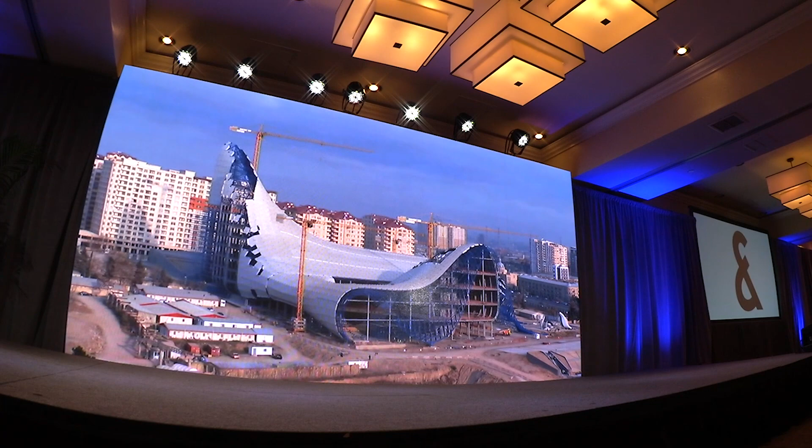Of all the times I've heard "don't look down," this is the one that I'm really being serious about. You're praying for me? That's always an encouraging sign.

Here we go. I'm now 1,000 feet from the surface, 2,000 feet. I'm now deeper than the Grand Canyon. I'm now almost at 8,000 feet. And I'm standing at the deepest point on planet Earth. I think this is the most incredible thing I've ever done in my life. My name is Danny Forster, and this is Build It Bigger.

This is a project designed by Zaha Hadid in Baku, Azerbaijan. Been to great places like Santiago de Compostela. This is the city of culture designed by Peter Eisenman. And this is one of the longest cable stay bridges in the world in Hong Kong. This is the Stonecutters Bridge.

Now, the show at its core isn't just about showing the biggest and the tallest and the deepest and so forth, but rather it's about actually getting onto the buildings and physically understanding the how and the why, how the engineers and builders ultimately execute these projects and why they look the way they look.

One of the things that we feel very strongly about is understanding how a building is inextricably tied to its place. The culture, the climate, the economic context, the sociology, and so forth. How is architecture a direct result of the place in which it's built?

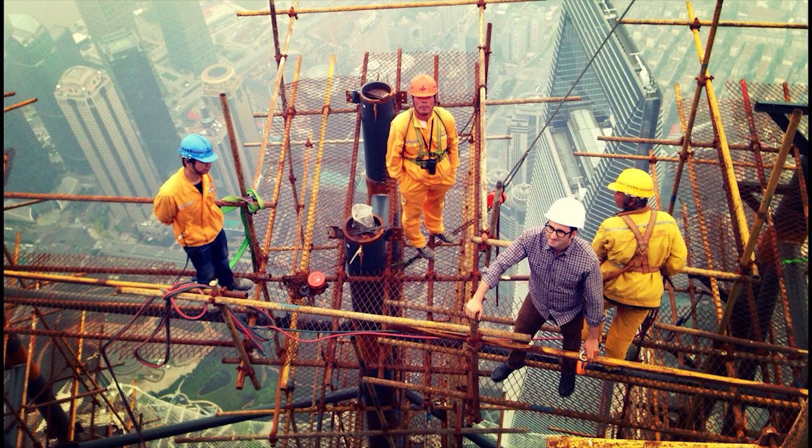A project we did in Shanghai, for those who've been there recently, this is the Shanghai Tower. It's the third of the 3 towers in Pudong in downtown Shanghai. It is the tallest building in China at 2,000 feet tall. And this is an image of us filming the episode. And as you can see, while China has great innovations, they are still waiting on OSHA to arrive.

Just for background, that's the Shanghai World Financial Center. The building looks like a bottle opener. That's 1,650 feet tall. And we're looking down on that building. So that's about 2,000 feet tall. And they're looking forward to getting harnesses at some point in the near future.

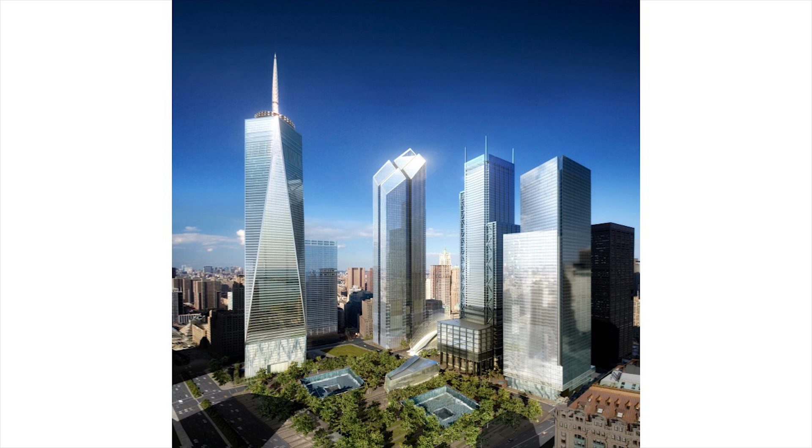In addition to being in front of the camera, I've had the opportunity to spend some time behind the camera. And a few years ago, got to create a documentary series with Steven Spielberg and the Discovery Channel called Rising: Rebuilding Ground Zero, which is a 6-part film that looked at each of the major projects at the World Trade Center site, explaining, again, not just how these buildings were built, but why do they look the way they look?

What meaning is embedded in the design of these buildings that make them inextricably tied to the event of 9/11 and also the development of a new Manhattan? And just by way of example, one of the episodes looked at Santiago Calatrava's transportation hub. Now, who's been to this building here? Who's seen it in New York? Been through it, right? Amazing, slightly overpriced, but very beautiful building in downtown Manhattan.

But have you asked yourself as you walked by it, why does it look the way that it looks? Said more specifically, look at the wings on this building. Pretty asymmetrical, right? Why go to the trouble to design a $4.5 billion train station, crank the building off the New York City axis, which produces asymmetrical ribs in the ceiling? Why do that? Any thoughts? Anyone?

Seemingly arbitrary, right? Very expensive choice. Well, if you look at the building, you can see it's been cranked at a slight axis, thereby putting it too close to its neighboring building to the left, which produces short ribs on one side and very long extended ribs on the other side, which is beautiful.

Now, the reason the ribs are cranked the way they were is because this isn't just a train station, but it's the transportation hub at the World Trade Center site. And so while every day during the year these beautiful shadows come into the space, they wanted a memorial in light, one that could never be changed. And if we remember 9/11, the sky was so blue and clear that day.

And so every year, heretofore at 8:46 a.m., which was the time at which the first plane hit the first tower, when you enter this building, instead of seeing shadows as you do at an angle, every single year for just a moment, shadows inside of this building will be symmetrical down the center of the spine of the building just for that moment, and then it will go on the rest of its day.

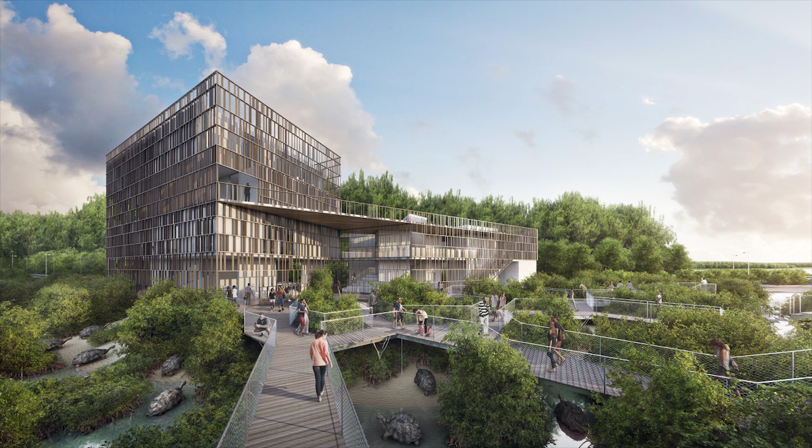Now, in terms of the work that we do architecturally, which is what I'm going to talk about today, my practice does a wide range of work from cultural buildings. This is a museum of environmental history in the Seychelles. This is a museum of ethnography in Budapest. This is the first building in a very large 11 million square foot master plan in downtown Charlotte called First Ward, which is under construction right now.

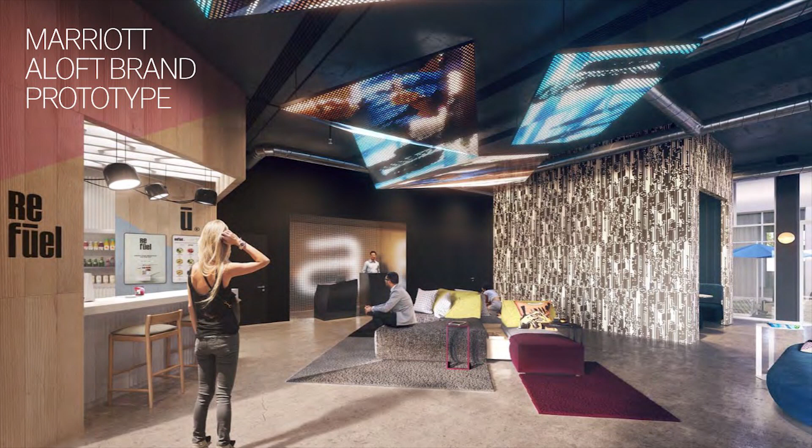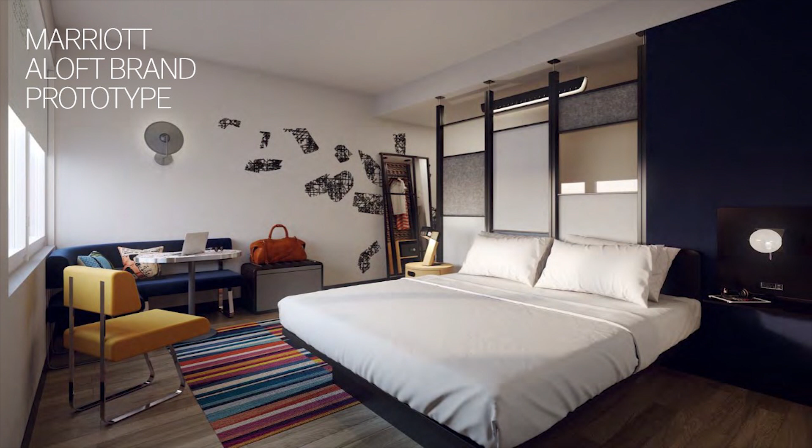We do housing and a whole host of stuff, but our practice is really focused on hospitality the past, say, 7 or 8 years. Recently, as Michael mentioned, with the acquisition of Starwood and the Marriott merger, we were really honored to be invited to take the ALOFT brand, a 10-year-old hotel brand, and reimagine it, create a new prototype, and relaunch it. And actually, we're building the first brick and mortar one right now, but all ALOFTs are part of the Generation 4. This is a design that we created.

But what I want to talk about is take a slightly deeper dive into 3 projects right now, 3 hotels in New York City, and really talk about our journey to modular. Not to say that it's the greatest thing, it's faster, it's cheaper, it's the future, everything's fine, but to show you how we honestly came to arrive at being modular architects and be candid about the struggles that got us there.

This is a project we completed about 2 years ago. Very proud of the building. It's the World Trade Center Courtyard Marriott. Won the Alice Award for Best Development 2 years ago. Sold shortly after its opening. Kind of interesting, compelling building just south of Tower 1 of the World Trade Center. So there's Tower 1, there's Tower 4. Just south of Tower 4, if you look, there's our site. So we like to think of ourselves as Tower 4.5.

And I say that affectionately in the sense that for us, it was a real important opportunity, yes, to create a great hotel, but to find a way to connect this building to the master plan of the World Trade Center site and make it part of that campus. And the way we did that was, in a sense, saying the World Trade Center ends here. And we literally designed the building to have a very austere stone south facade that said, that's old Manhattan and that's new Manhattan. And there's our building that defines that southern edge of the campus. You can see it right there, quite literally.

We've got relentless square windows on one side and a very, very different facade to the other side. So the building sort of speaks 2 languages. Old New York to one side, then a very dramatic, crisp, taut window wall looking to the north.

You'll notice the building cantilevers over its adjacent neighbor, which for those of you who build in tight urban areas, we oftentimes come up with crazy gymnastics to get an additional room into the plan, right? We call it FAR, floor area ratio, but at the end of the day it's how much real estate can I squeeze onto the site to raise the profitability of the building. It's that simple, right?

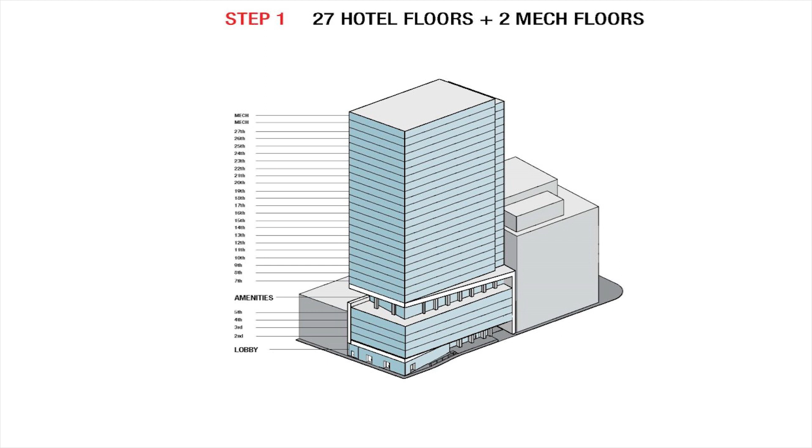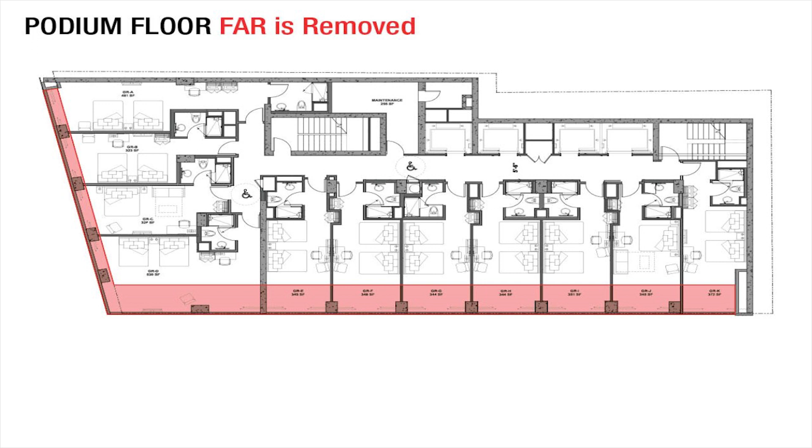But the problem was our podium, right, the first 5 stories of the building were really fat. And big, fat, long hotel rooms don't make more profitable hotel rooms. They just oftentimes can be wasted space. And quite specifically, if you look at the plan of our rooms here on the south side of the tower, we ended up with a queen-queen or a double-double condition that had a 345 square foot room, which I'll be honest with you, in New York City, it's too big. We get away with murder. I mean, we've got the Bowery Hotel here, right? The Pod Hotel, you can get away with 86 square foot hotel rooms.

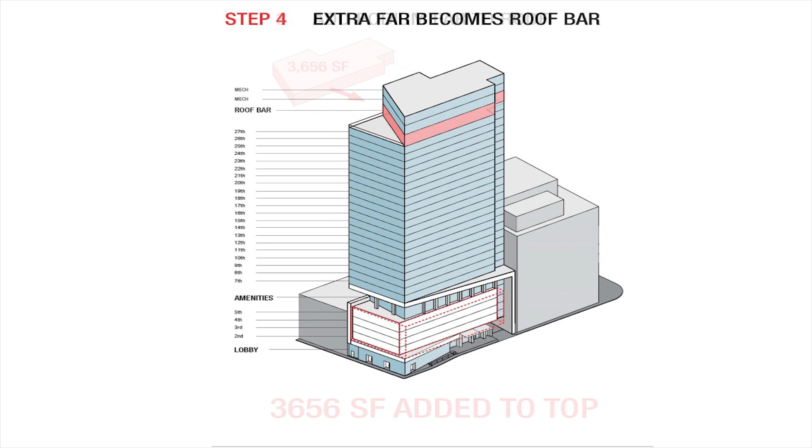But my point here is the argument was made that could we find a way to compress the hotel room, to actually pull that room back and not use up that real estate? Well, the problem was it's against the law. So what do we do? We chopped that bit of real estate off just a little bit here from the west side of the building, and we said, okay, if we just took that real estate, that 3,656 square feet, and we yanked it off the building, reshaped it, put it on top of the building, set the building back, you could create an amazing rooftop experience with a triangular outdoor space with an incredible view of the World Trade Center memorial pools. That would be great.

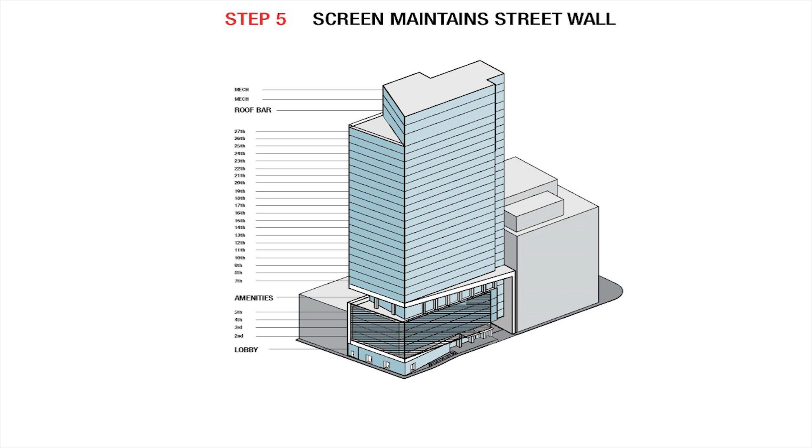The problem is, we've just broken the law because the city says you must hold the street wall. The problem is the city also says if you put a wall there with a hotel room behind it, that's not legal light and air, that's not a hotel room. So our challenge was, how do you produce something that is both a window to one group and a wall to another? Literally two diametrically opposed things. And what we came up with was this.

It's an algorithmically generated cantilevered screen wall made up of mesh. The mesh is 50% opaque and 50% transparent. There's 50% coverage of the mesh, therefore 50% open. So one group said you can't be more than 50% covered. One group said you have to be no less than 50% covered. Turns out we had one solution that satisfied both groups. It's an interesting, bizarre way to wrap the bottom of a building. Produces a kind of interesting design.

Each and every single piece was subtly shifted such that every operable window still has clear access, so you can still take your Instagram photos. And in some cases, you could make the argument that it's a kind of interesting architectural detail from inside of the rooms. Now, I showed this just to say that it worked. It took 6 months. If you try and apply for a screen wall in Manhattan right now, the Department of Buildings has like my face on the wall and will say no. And I say that because this is a bit of a kind of a unicorn, right?

We did it once. We as architects were able to make a good building that followed zoning, that helped our owner to get more additional FAR, add rooms, add a rooftop bar. So as architects, we could participate in the process beyond just making it beautiful or effective or operationally sound. But this is hardly something I can do a second time, right? We did it once. So how do we then, as architects, find a way to contribute in the process to the bottom line beyond just making the building work?

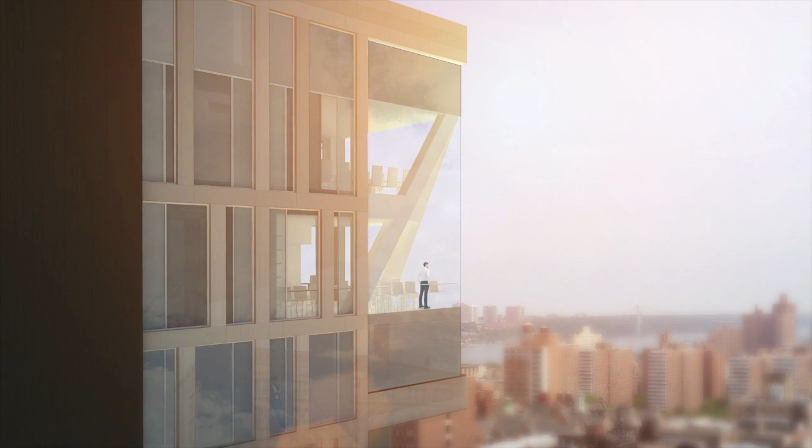It's got a kind of beautiful, large, upper double-height space in the top of the building, great views out to the west, an interesting flipped-up column on the corner to create a double-height looking northbound. But at the bottom of the building, what we ended up doing was actually literally removing as much real estate as we could to have as small a footprint as possible when the building met the ground, so we could then take that real estate, as I talked about, and redistribute it to the top of the building.

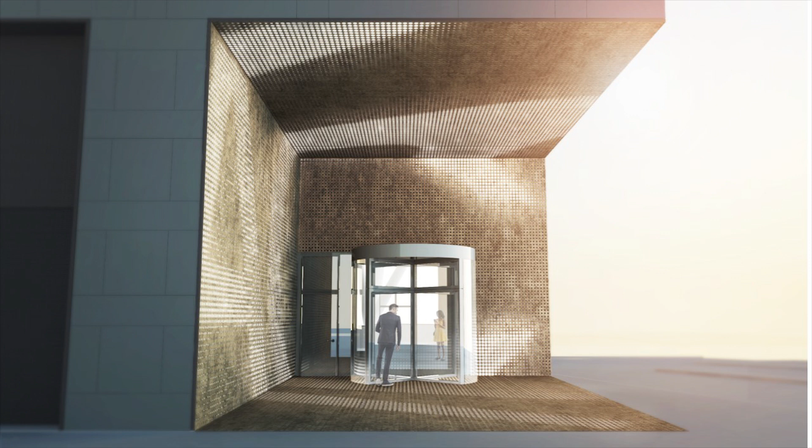And nowhere is that more dramatic than at the entry of the building, where instead of having a canopy, we literally have a missing tooth of the building, a sort of missing leg of the stool, where you move under a double cantilever 20-foot tall, 28-foot long entry to come into the space. All of that is a preamble to say this.

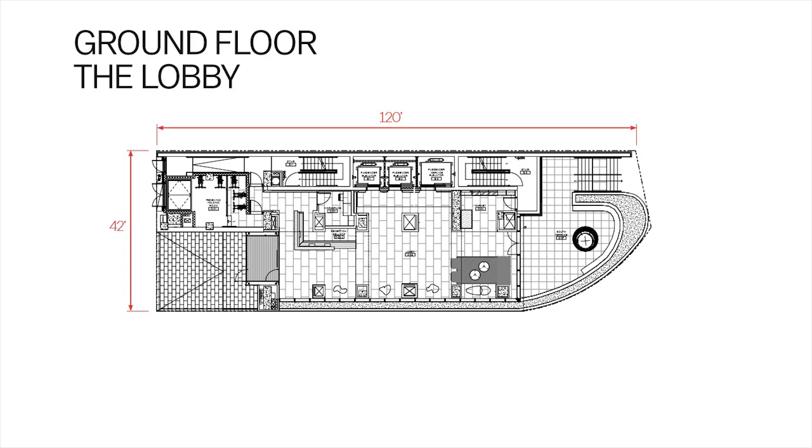When we inherited the site, these were the dimensions given to us, 42 feet wide by 120 feet long, and the developer didn't have the ability to have windows on that side. So in a sense, it's a three-facade building, right? It's a three-facade building. It's 42 feet wide. It'll be a cast-in-place concrete building. From that moment, when those three decisions were made, my hands were kind of tied.

Yeah, we could do good things. We could value engineer the curtain wall. We could have clever ways to make it work. But when you look at that guest floor plan and you see where the elevators are, the stairs are, the rooms are, the size of the rooms, the corridor, I'd like to say I had a lot of flexibility to make a really good plan, but I didn't.

And the logistics of the site and the size of the site and the methodology of building it drove the entire process and the budget of the building. And we're grappling with this project's budget for that very reason. So as an architect, you're kind of frustrated. You wish you could do more. And in this case, building it as we did, we couldn't. We did the best that we could.

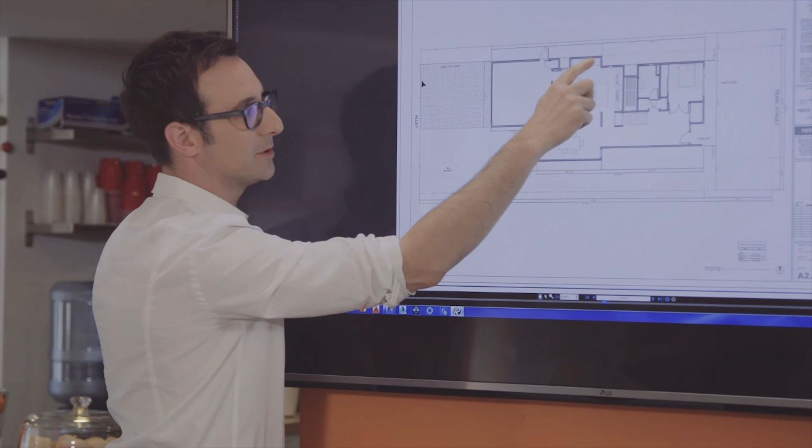Now, modular, of course, would make a lot of sense for a lot of different reasons. And I had been curious about modular for a very long time. I've actually been working on a new TV show about modular, but this is the kind of modular America does: wood frame, single family home. We've got a great history in this country of doing wood frame modular. This is one of those shows where you meet the family, they tell you what they want, we design a house for them, we tell them it's going to be great, we show them the house, I tell them how good it is, they agree.

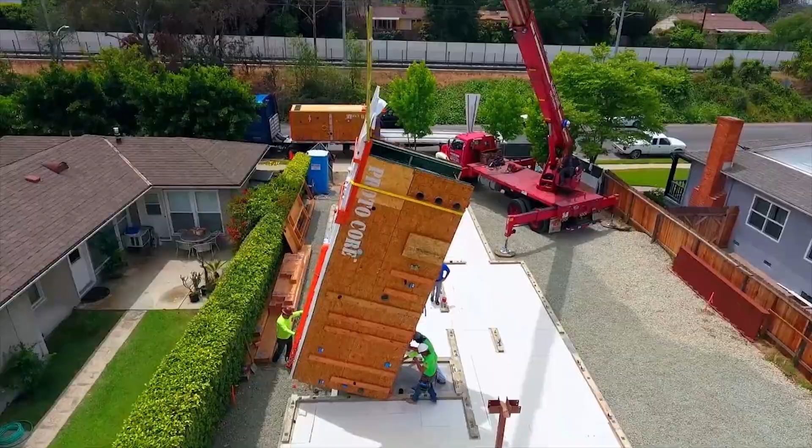We then build it in just a matter of weeks. A truck comes to the house, we drop the core down. This is quite cool. In this core, you have all the MEP, literally all the infrastructure in one shot. The bathrooms and the kitchen click into it. The very same day, we stack up a series of walls, and then 14 weeks later, you have a house. It's great, totally cool. And that works. And in America, we've done this for quite a while. We've got different companies with different kinds of capabilities for wood frame modular, and it's been very successful.

Now, in the work that a lot of us do, when you get above the kind of concrete podium 4-story building for high-rise urban infill development, wood frame is not an option. So if you're interested in doing high-rise multifamily architecture and you want to be looking at steel volumetric modular, America has not had a very deep level of experience in that area.

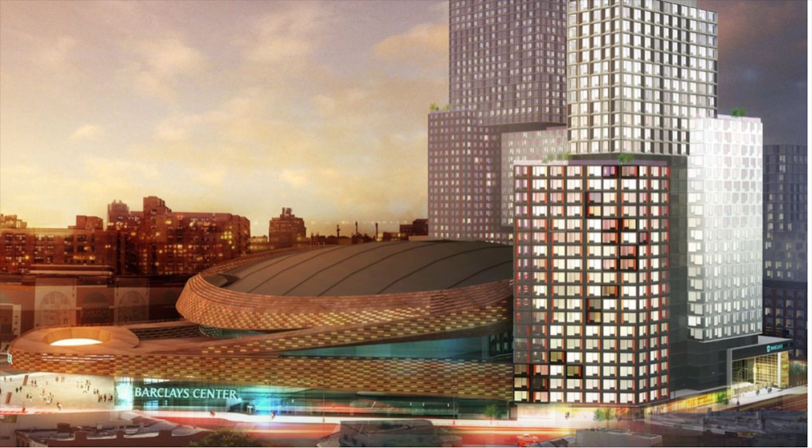There are a few projects, and there are some folks in the audience who have spoken and worked on some of these projects. For those of you who know this, this is the Dean Street residential building attached to the Barclays Center in Brooklyn, New York. First high-rise modular project in America, 363 units, kind of an ambitious way to start. And in today's Q&A, I'll be happy to talk about each one of these, and there are pros and cons to how all these projects went, but they struggled.

They weren't all, let's say, grand slams. As you can see the building being erected here. This is the Pod Hotel, and again, we have folks who've worked on the Pod Hotel in the audience today. It's completed, it's open, a lot of challenges, a lot of issues in producing this building, but there it sits and it looks great.

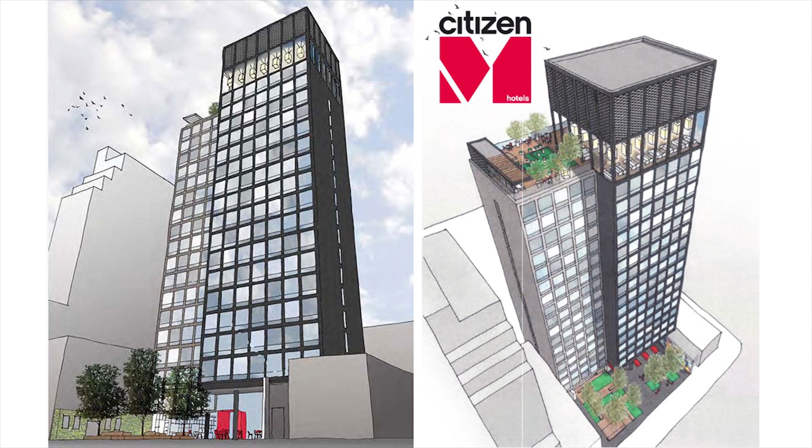This is the Citizen M we heard about as well in the Bowery today. Actually, my office looks at this building. This building, I think, recently opened, right? So it's open for business at this point. Again, a project that had a lot of different challenges and come into fruition.

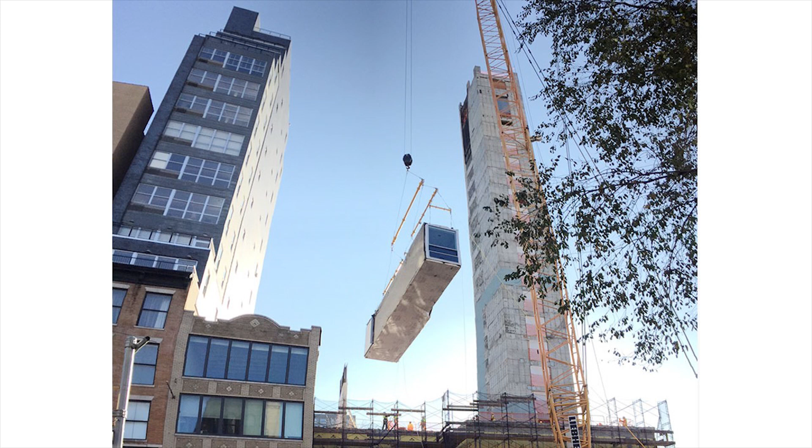So why, given all of the different challenges, would we endeavor to do a building that is yet taller, more complex, and potentially more risky? And the reality is we believe deeply in this as a methodology, but we also want to be honest with the fact that it's really complicated to do. It's very, very challenging. It takes a reimagination of how you put buildings together from beginning to end. So what I'll do kind of briefly is take you guys through this project.

This is 842 6th Avenue at 6th Avenue and 29th Street in Manhattan. It will be the tallest modular building in the world. Right now it is being manufactured in Poland. In Krakow, we've got about 120 some odd of the rooms in construction, nearing completion. They'll be kind of on their way in a boat back to America in January.

In New York City, we're building foundations as I speak. So this is an interesting moment in time. We're right in the middle of the project, kind of design is wrapped up. We're now in the administration process. So there's the building, and there it stands.

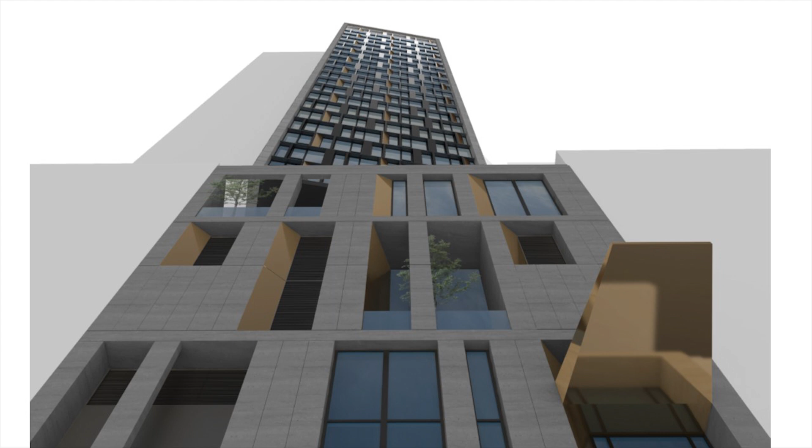First thing you'll notice is that it's hopefully decent looking, but the first thing you'll notice is that it's actually quite conventional in some respects. You've got a very tall 3-story podium and a tower that rises behind, cranked at a 14-degree angle. That angle, I will promise you, is due to very esoteric zoning requirements in order to create light and air opportunities. It's not an aesthetic gesture.

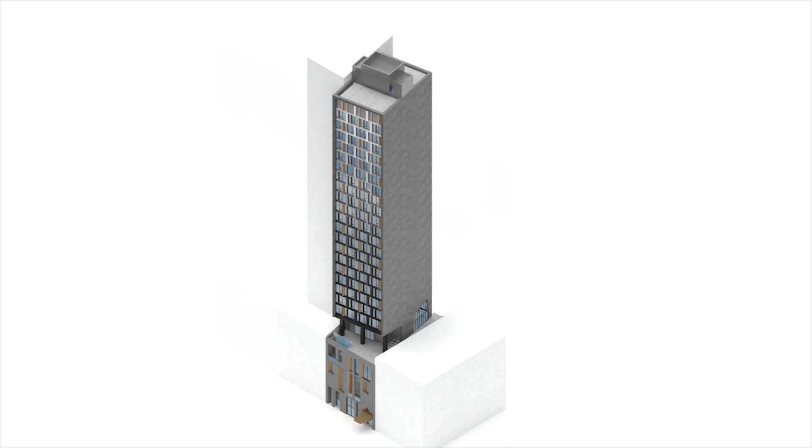But if you look at the tower, really in very simple terms, from a modular standpoint, it is exactly what you want in a modular project. Why? The podium of the building is built in New York. The top of the building is built in Poland, right? And I say that because the programmatic breakdown of the building is specific to the methodology, right?

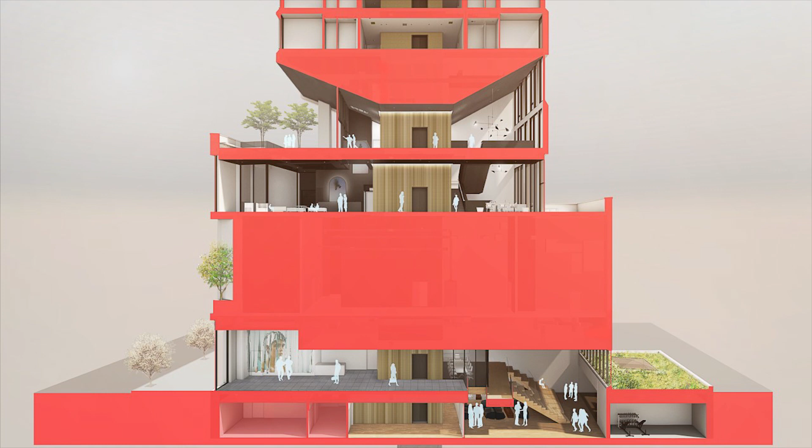By that I mean, in the bottom of the building, where you're building in New York and you're building out of concrete, go nuts, have at it, right? Your amenities program, your back of house program, your idiosyncratic program, your unrepeatable program, double height ceilings, slope ceilings, indoor, outdoor spaces. We are totally unconstrained, right? We can design as we've always designed and make an amazing, compelling public space with great food and beverage opportunities.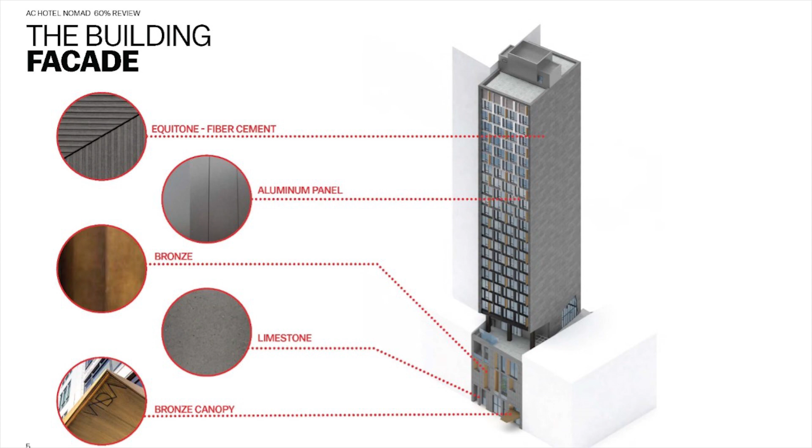That's fine. But when you rise above that transfer slab, as you see right there, the building becomes relentlessly repeatable, as absolutely automated as possible. You want that building to be tuned to be fabricated in a shop. From a facade standpoint, you'll also notice, as you look at the building, there's a kind of a variegated metal facade. You've got a stone facade to the south and a stone facade on the podium.

But when you look at this building, the question I'd ask all of you is, does it look modular? If I'd said to you it's a modular building and I showed you that beforehand, would you have known? One of the things we feel very strongly about is that, at present anyway, in this room, we all think modular is a buzzword. Outside of this room, people think it's a mobile home. And that optics break is a real issue at this point.

So from a kind of optics standpoint, we firmly believe this should be read legibly as an iconic piece of great architecture. It should be a great hotel. It should be an amazing property, irrespective of how we built it. When you've gone through the hotel experience, we'll tell you how we built it, and we hope you giggle. You can't believe it's true.

Now, the way in which we're able to break down what is oftentimes the critique of modular, which is that it looks like a bunch of stacked boxes, is twofold. Number one, you'll see the facade starts out as a kind of a dark metal, and as it rises up, that metal gets slightly brighter and whiter.

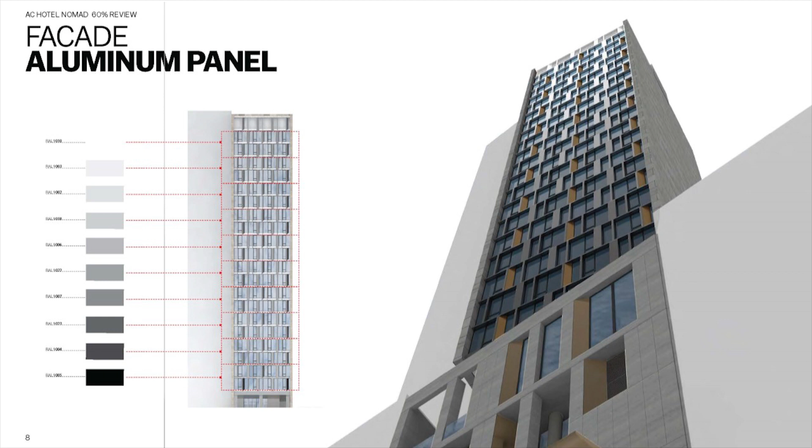Well, that's also an opportunity to clip on a little bit of a slab cap cover as you would in a window wall system. So it gives us the opportunity to clad the building and let it read like a piece of architecture separate from that of a modular building. But it also gives us both belt and suspenders because we get additional waterproofing coverage.

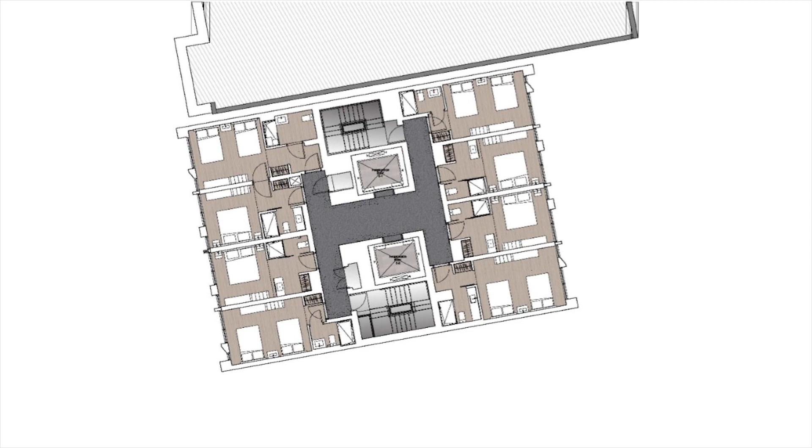Now, from the tower of the building, what's important to note here, as you can see, is it is rigorously symmetrical. And I'll be honest, this building did not start out as a modular building. We actually were designing this building conventionally, which I wouldn't recommend. If you're doing modular, start modular. But we had been designing buildings before.

That Hudson Yards building had been such a complicated building with so many facade types and such fussy geometry. We wanted to create something really simple and clean just for our own sanity. And it lent itself, as you can see, to a modular opportunity. The rooms, as you can see, they copy each other at the corners. They're not even mirrors. They're just rotated versions of themselves.

Now, if you look at what's colored in red here, that is what we build in New York City, and everything else is what we build in Poland. So the structural spine of the building, the elevators, the stair towers, and a very slender piece of corridor space is cast in concrete. And as you'll notice, the hotel rooms come with their own corridors, which is a very common strategy for modular. So if you look at a king room right here, just as an example, here you can see the rooms.

So people always say, is it a container ship? It's not. It's a bespoke steel object, HSS steel tube, structural steel on all 6 sides of the building. The mechanical systems, the facade, the FF&E, the ID, everything is in this thing before it leaves the factory, right? But you'll also notice that the corridor comes with it as well, which is a critical piece of the puzzle.

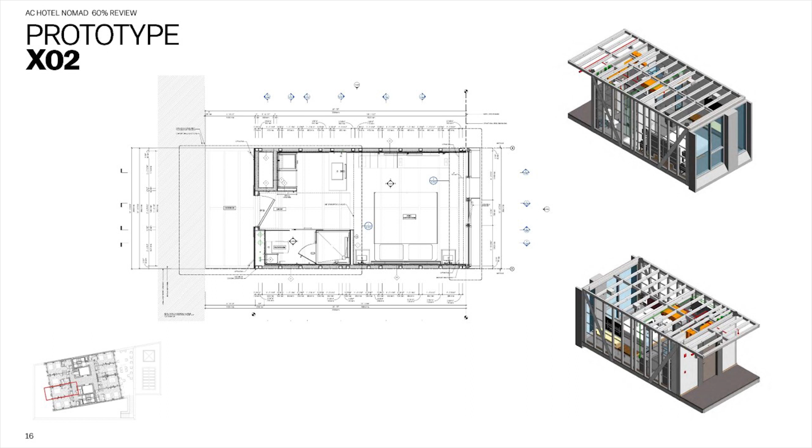So if we kind of look at this and take a slightly deeper dive, a few things to take note of. Number one, there's no mechanical shafts in the body of the room, right? When you design a modular building, you pull all of the mechanical infrastructure to the corridor located here and here. Now, why do we do that? Because when that thing leaves the factory, the door is locked. When I say the door is locked, I mean it's actually locked. The GC on site doesn't get a key.

So when the mechanical contractors, or the electrical contractors, the plumbers arrive, they take the elevator, they walk into the hallway, they make their connections, and then they bugger off. They're not actually allowed into the room. So the mate line work happens in the corridor. So the room is finished in Poland, but the corridor is finished in New York later. So they can have as muddy a boot as they want. It doesn't make a difference. They make those connections there.

Now you'll also notice the aspect ratio, the geometry of, I have a laser? No. The aspect ratio of the shafts are quite skinny. Now that actually isn't designed specifically to fit the pipes perfectly. It's actually designed to fit someone's back and reach more comfortably. The most critical mate line work that's happening is connecting the plumbing of one to the plumbing of the next. And oftentimes you'll see on some of these projects, the shafts are quite deep, which means the men and women working on them are actually reaching quite far, oftentimes having to tie off.

By compressing the width of the shaft space, that means the mate line work is happening directly next to your eyes. You're not tying off. You're able to really get your hands around the work. The width of the building, yes, of course, it's designed to fit a bed and be a great hotel room, but it's also designed to be optimized to be stacked 4 wide in a ship.

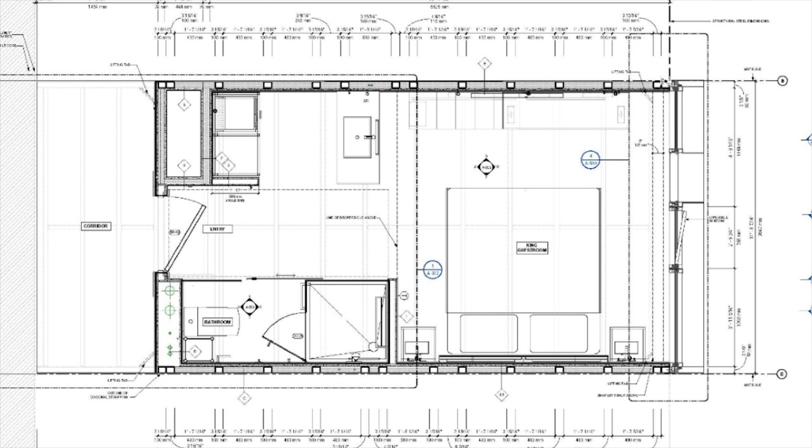When we ship this building, the entire building comes in one shot. And so by being 11 foot 8 inches, that allowed us, as we stack across the divide, to optimize it for shipping. So you're making decisions with the design of the building that are based upon shipping, turning radius of trucks, the allowable width the Department of Transportation lets you have on the Manhattan Bridge, the reach of a person installing a pipe shaft. And these kind of, we'll call them limitations or constraints, become the driving force that helps shape the design of the building, of course separate from all the brand requirements.

Now, what I'm showing you here are our manufacturing drawings. And so a couple things to note. If you think about the typical life cycle of any project you've all worked on, the prototype that we build for this building happens during the back end of SD, the kind of beginning of DD. So just to get your mind around that, you're still figuring out the building in very generic and broad terms. And simultaneously, your team has to be at a point where they're making decisions at this level and creating documentation of this specificity.

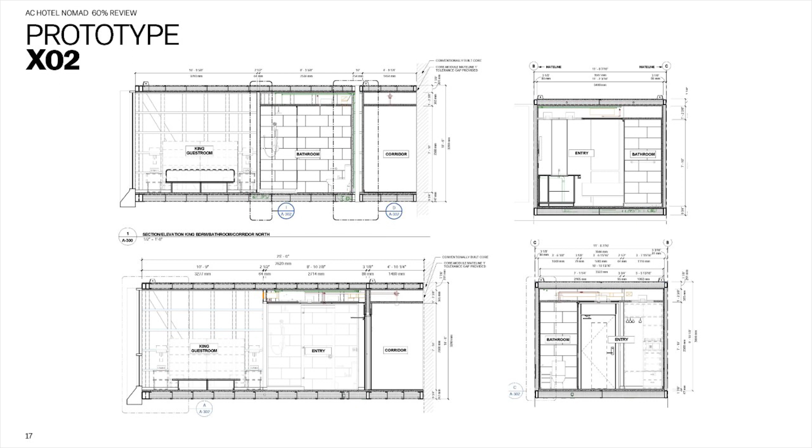So it is a complete shift in how you think about your labor force and your time when you're organizing a building like this. And I say this also to be clear that we're not just talking about the building being designed loosely, we're talking about full mechanical coordination 3-dimensionally happening in each. Because when you build a prototype, it's not an aesthetic mock-up, it's a functional prototype. It could be the first room. So in this case, the Mitsubishi VRF system. So your mechanical engineers have to be this specific and this final at this point in time.

So this gets us to the first challenge of modular. Having to make hard choices that are expensive early in the process and having to build consensus among people who haven't done this before. It's really hard. So if we could jump to a browser for a minute, I want to show you guys a technology that we developed for this project, which we now use for other projects. It was a way to help our developer and help us make decisions, get brand on board, and think about the financial realities you have to commit to at a much earlier point in the process. So if we could jump to the browser, please.

So what you're looking at, and we heard earlier today there was some talk. Oh, can we throw it on the main screen or no?

We heard some talk earlier about using VR and so forth, and VR is great. We love VR. So if we just look here for a minute. So this is the guest room. And so you can fly around here. Giles, if you would, just give us a little tour of the space here. You can see the room, good-looking room, bed, TV, facade, FF&E bits, some custom art. This is the specific piece of art on the wall. And so you're looking at the room to a T.

And so VR is quite common. Many architects use it. Many folks use it. Good visualization tool. But for us, we weren't just saying, does it look good? We had to figure out, what does it cost, and can we specify everything and get it bought on time given the schedule? So if you roll your mouse over, you'll see things start to light up. So if we click that for a minute, that's the chair. One of the things we're always concerned about is the spec doesn't get followed, right? We all know that struggle.

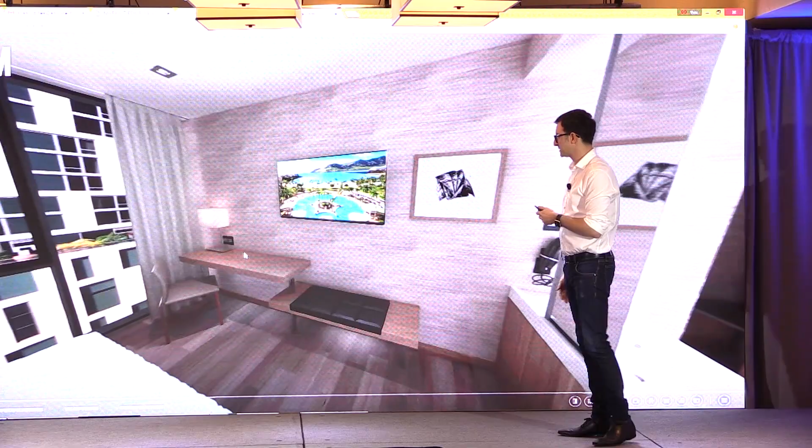That's fine. But one of the other issues is making decisions financially, because the room you're choosing, you can't make changes later. I mean, you can, but it's a nightmare. So you have to get your ownership group to commit 1,000% to these products, to this design at a very early point.

Remember, we're kind of at like early DD. So Giles, if we just look at the front door for a minute. So here, if you look at the door, you've got this nice wood panel and this nice ceiling panel. The question was, is it worth the money? Is that entry experience, does it require that wood wrapping ceiling there? So if we kind of look up for a minute, that's great, just kind of pan up for a sec.

And if we click on VE for a minute, on the bottom, you can see we embedded some of the options that we were studying. So if we click on, let's say, ceiling detail, because in modular, you have the cost of everything at the top of the project because you have priced this thing, right? Because you have to go into manufacturing. You are able to look in real time at the cost. So if we take the door panel off as well, you can simultaneously understand the architectural, the guest experience, and the financial implications.

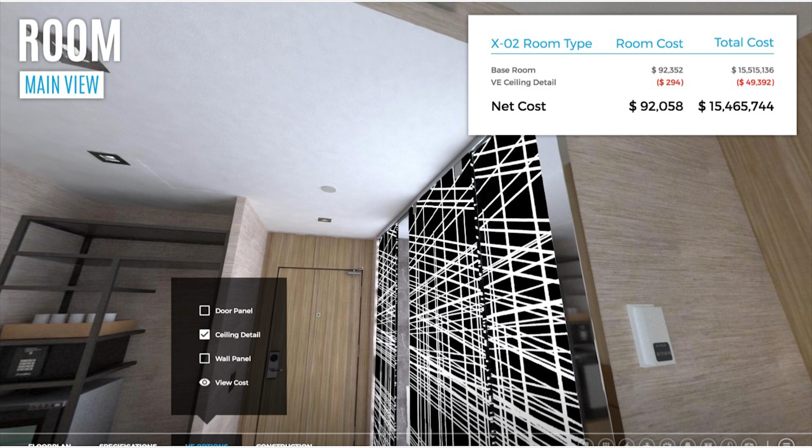And we spin back over to the bed, Giles, if you just pan over to the bedroom, you can see that wall panel behind the bed was also a big item in question. If you pause there, thanks, advance forward, that too can get pulled off the room as well. So you can click on the wall panel there, remove that, and so on and so forth. So you can get the gist, right?

And if you just close that up for just a moment and click on specifications, to the left, yeah, perfect. And hit view all. So every piece of the spec is embedded into the VR. It's slightly clumsy, but we built it for this project. It's not like an out product, but it gives you a sense of how you can take your spec book, you can take the architectural vision, and you can then say to your ownership group, this is what you're building.

You can give this VR out to your contractors as well as to the modular fabricators and say, does it look like this? Because as we heard earlier, those 2D drawings are great, but when you fly, in our case, 25 people out to Krakow to review this thing, you're making commitments that once you say go, 168 of them are being made shortly thereafter. So getting that model room right, there's a little less flexibility than normal projects. That's great. If we could jump back to the PowerPoint, that'd be wonderful.

So this is just one of the tools that we developed to deal with, I would say, one of the two major issues, which is having to make choices earlier and committing to those choices. And a tool like this allowed us to get us, ownership, brand, and all the consultants in lockstep at an earlier point in time.

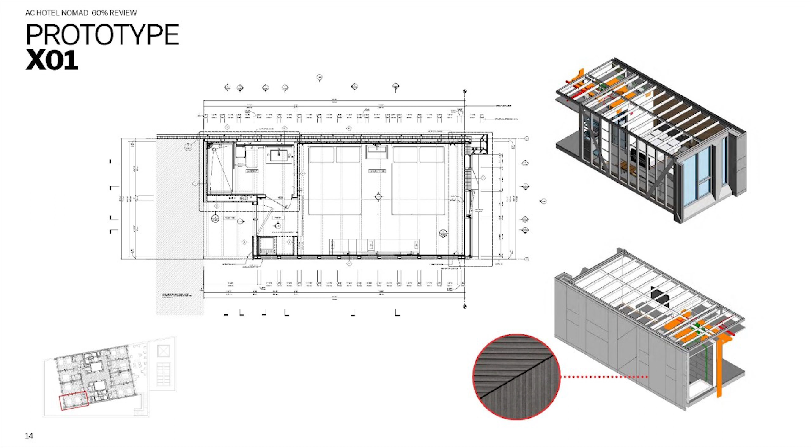Now, so what did it produce? What I want to show you here is actually the prototype that was ultimately built. So we're well ahead in fabrication, but in November of last year, our team, Marriott, and a whole host of folks flew out to Krakow to review the prototype. So this was a queen and a king room space, and you can see the prototype there. Facade is on the building.

The cladding, now this is a little bit deceptive. We actually will apply these panels. This is a cementitious rainscreen panel. That'll get hung in New York City, but the girts, the exterior insulation, the waterproofing, all of that happens in Krakow, and then they just clip the panels on in New York. And you can see that's a very simple off-the-shelf product called EQUITONE. Looks great.

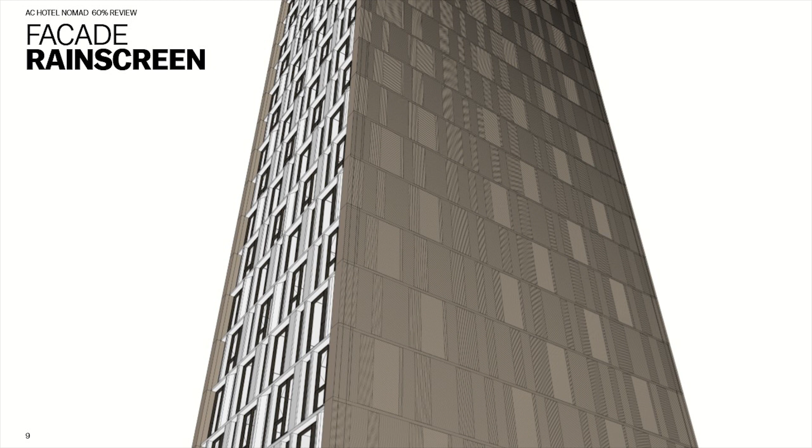All the art, all the pieces, everything you see is what we're getting, 168 of. Now, one of the challenges, once you go to this point and you look at your prototype and you kick the tires and you're comfortable with it, construction administration is really tricky when you're in New York and someone's in Krakow, right? So that's problem number 2 in modular: how do you QA/QC a project that's quite far away? Some domestically built projects are good, but at this point in time, there are not that many manufacturers in the States who can do projects of this height and size out of steel. So what do you do?

So if we could jump back to the browser, the second piece of technology we co-developed for this project is we are using 360 technology, which many people are doing, 360 cameras, and stitching them together, but using time, right? Because it's really about time. So if we jump to the other vista, yeah, great. If we just jump into the room, you can go close. So this is Krakow, all the way to view 5 if you don't mind. And these are the prototypes being built.

And so what we do is, based upon the VR, we then locate cameras, you can see these 5 specific views. And then at 4 stages during construction of all 168 modules, and you can sort of pan around a little bit, what you're looking at is a 360 time lapse. So you can rotate in time and see the building get built. You can see the spec is all fully embedded into the cameras as well. So we can see it at steel, we can see it at rough-in, we can see it at sheetrock, and we can see it when the FF&E comes in.

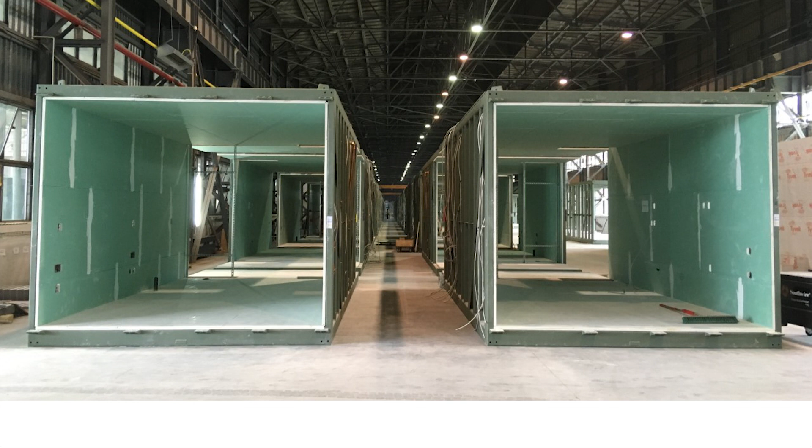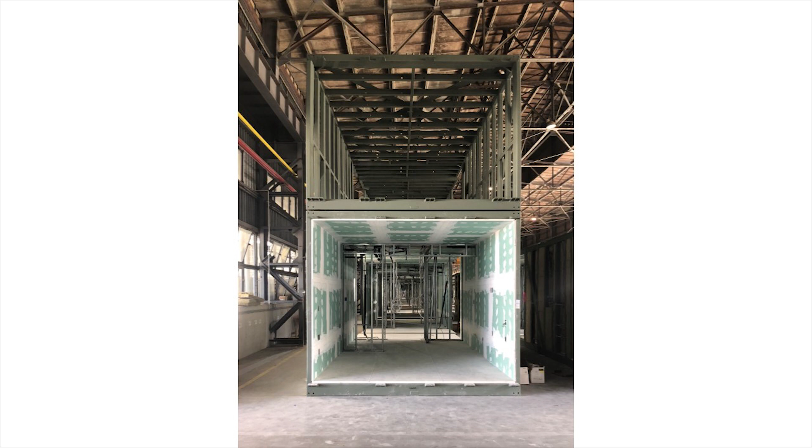And this is where we sat about 4 weeks ago. We had about 108 modules in the factory at that point. We were just beginning our stacking tests, which is always encouraging to know it stacks. And as I said, we're going to be bringing them back to America in January. And hopefully it'll look something like this, perhaps a little less dramatic, but hey, it's a rendering.

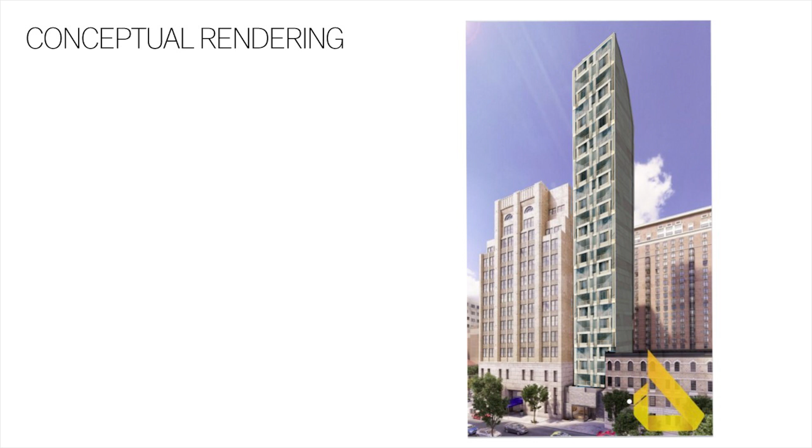I will say this, we are fully engaged in this process. This is a project we're working on right now in Brooklyn. It will be the tallest modular hotel in Brooklyn. And I showed this just to make the point that this isn't a fluke and that this isn't a one-off, and the folks in the room who are also doing this kind of work can commit to the fact that there are practitioners very engaged in modular construction. This is the project in Brooklyn.

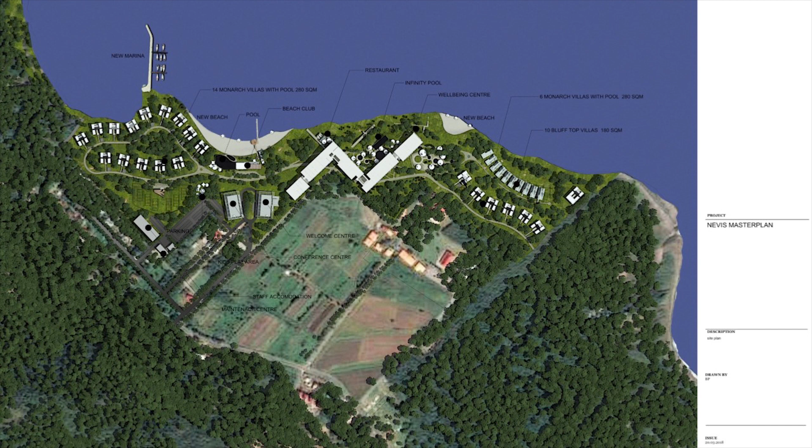And we're also working on a project on the island of Nevis right now, which will be, as Michael mentioned, the first 5-star modular hotel in the world as well. A project called the Nevetian. It's about a 160 key hotel, as well as hybridly built modular villas that are going to be half built on site and half built modularly. And you can see that project right there.

And I show this just to wrap things up to make the point that these are very large and very fancy rooms. These are 5-star rooms. In some cases, we're combining 3 modules together to create very elegant suites with kitchens and large bathrooms and moving walls and balconies and outdoor spaces and plunge pools as well. It's crazy, it's really interesting, but my point is that you are not limited by any means. The technology doesn't determine what you build or how you build it. The technology is wildly flexible. It just takes an insane amount of coordination to get it done.

I know people always ask, is it cheaper, is it faster, is it better? It's all of those things if done right. It's an unmitigated mess if it's not. And we don't have that many feathers in our cap at this point to say that this is the holy grail. It will be, but it will take time. It will be all the more effective when we have domestic manufacturers in America.

I spoke last week at the Build America Summit in DC at the Library of Congress with Congressman Donald Payne and Elijah Cummings, who are very engaged in looking at ways to bring subsidies in America to find ways to bring manufacturing back to America.

And modular is an area where there's a ton of excitement about it. So there is a groundswell of activity. People are talking about it. It will require developers and folks in this room to support this effort, because at the end of the day, it gets better for all of us if we all do this and work hard to succeed at that. So with that, I'm going to pause and take any questions.

In terms of the design phase, at what point have you settled on which company you use for technology? Very, very early. When we decided to flip the building to modular, we basically paused the job, took about a 6-month due diligence phase where we vetted, we looked at all the projects I showed you today, we met with all the manufacturers, all the fabricators, and once that decision was made, the general contractor and the modular fabricator were selected at the same time.

So there's no bidding. It didn't go that way at all. It was a sort of deep due diligence phase for us. A decision was made, and at that point it's basically IPD, integrated project delivery. Your architect, your GC, and your modular manufacturer are a team. We don't say design build in New York City because it's not legal, but in practical terms, it's a design build job.

Yes, sir. That's correct. So there's 2 methodologies to modular high-rise. The one that we're proffering here is you have a concrete core that functions as your elevators and your fire stairs. That's also the lateral bracing. The modules themselves are steel buildings that can hold themselves up, but they can't take wind load, and they can't take lateral. So they bolt back into the core, and they bolt into each other, which gives them their lateral strength.

An alternative methodology is a brace frame system, whereby you can build the stairs and the elevators out of steel frame, have no concrete in the job, and then it's just a rigid steel frame building. Both are available. Both have pros and cons, and there are folks doing both right now. Right, so the cruise ship methodology is like what you're seeing here. The core is there and you snap the mods in.

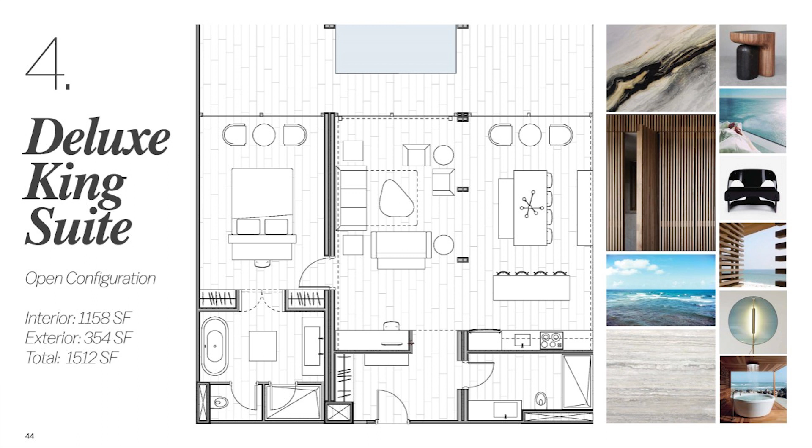There is another way of doing it where you don't deal with the challenges of concrete likes to go this way, steel likes to go this way. Sometimes they don't meet happily together. But like everything, lessons learned. On the Bowery project, they cast their entire core top to bottom first, and then the mods came later. Well, lo and behold, concrete has a tendency to creep, and that can be challenging.

On our project, one of the lessons learned is we cast our core progressively. So the core goes up 4 stories, we pause, we stack 4 stories, we pause, let the building settle. Cast the core 4 stories, pause, stack the mods, and pause again. These are things that slow the job down, and modular is all about speed, but any project schedule falls to pieces if you're messing with the embeds in the concrete because they don't line up. So this methodology brings on the challenge of concrete, but there are also some good things that come with it.

I don't know if you can speak to the manufacturing side. Sure. What are the challenges with bringing manufacturing to the States? The modular that's being done in wood, are those the same facilities, or are they not going to be? No. Some of the big wood guys are likely going to be acquiring some of the steel factories in America, so we'll see what's going to happen. But you're asking about overseas? I'm asking, how soon do you think we'll see that manufacturing in the States?

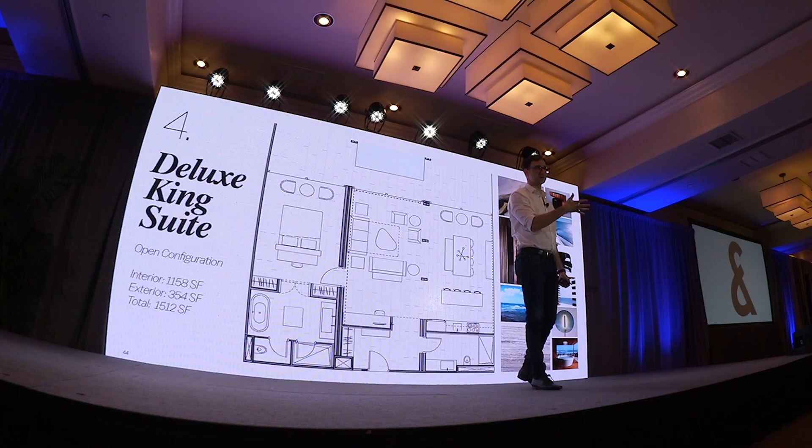Well, there are companies. There's Full Stack in Brooklyn, there's Deluxe in Pennsylvania, there's a company in Austin. There are modular companies right now in America doing volumetric steel buildings. They exist. They haven't gone very tall yet, and things get tricky when you get tall. So it's not that they can't do it. I'm sure their brochure says they can go to the moon.

You know, the question is, are you going to put your money down and feel comfortable, right? So it's about building that skill set. So they're here right now. I mean, Citizen M can speak to why they went to Poland. We can talk about why we went to Poland. But I think it's not happening now because there simply isn't the comfort level. But my sense is that's changing every day.

But you can ask yourself, too, the cost savings on the labor relative to the cost of shipping, gosh, that's a huge number you've got to make up, which at this point it does pencil. But very, very soon, that's not going to be the case.

What's the warranty like when you look at all the trades combined within a modular unit? Yeah, I mean, at the end of the day, it's no different. You require the same things of your FF&E providers and your ID providers and your GCs as you would in a regular project. So there's nothing different in that regard. You have to structure your contracts the right way.

I mean, we were very fussy in our project to make sure that the general contractor is the modular fabricator, that they're one and the same, that you don't have sort of GCs and subs in that respect, which at least helps in terms of finger pointing and responsibility matrices. But at the end of the day, it's a GC who's delivering our product.

Assuming all of your coordination goes as it should, how does the cost compare to conventional? You know, I think everyone has a kind of different statement about this. At this point in time, if we can be cost neutral and faster, that's my goal. I would say there are qualitative value adds that may not be obvious. Let's say one. On our project, 80% of the real estate is modular, right? You have price certainty on that at a very, very early point in the process.